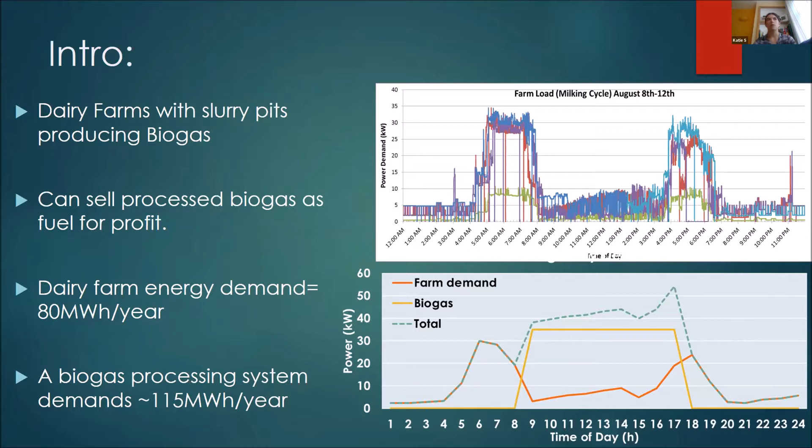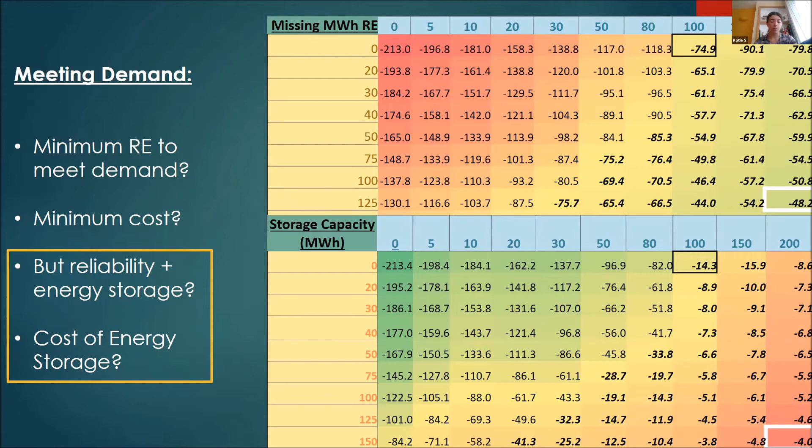Not even taking energy storage into account yet, those would be the minimum. But with energy storage, you want your storage capacity to be lowest, so you want a combination of solar and wind to bring down the actual capacity required at any one time.

In terms of actual energy storage, we're looking at using the methane produced to supply the missing energy. But the methane can be sold for profit, so we don't want to use too much of it. We have this balance we're trying to find.

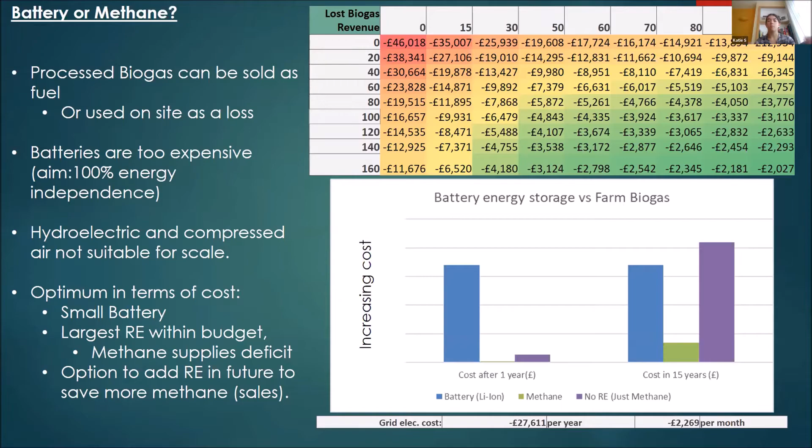But if you reduce that with renewable energy, you can minimize the methane use, making it more affordable until you can buy more renewables. So we're approaching this as a staged project: install one amount of renewable energy, then later, once more money is generated from selling methane, upgrade the renewables and become more energy independent, making more profit. That's the overview of our project.

Questions are welcome. The graph shows, with the example given of 102 kilowatts of solar and 80 kilowatts of wind, the average power supply, and hence the power demand from the farm and battery as well.

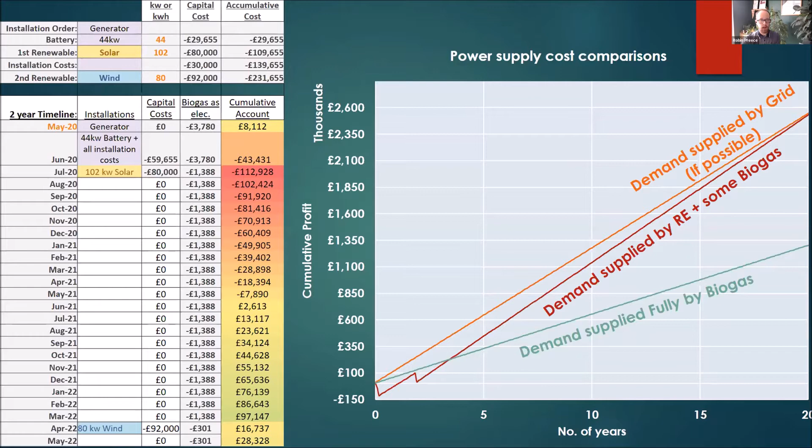Brilliant, thanks so much. I can't see anything in the chat column, so I'll chip in. How far through the project are you? We're at the stage where we'll be starting to install some wind, and there's already solar installed. Okay, excellent, coming along then. Brilliant, thanks very much. We might get some more questions later, but that's really interesting to see. Thank you very much. In the interest of time, we'll move straight on to the next one.

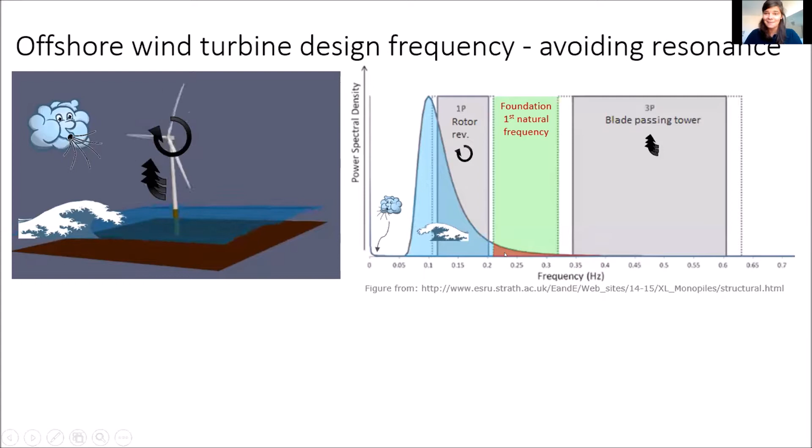And the frequency of wind and frequency of the waves. That's why monopile-supported offshore wind turbines are normally designed so that their natural frequency falls in this middle green range. The problem is that waves are a broad-banded frequency, so the higher end of the spectrum might overlap with the natural frequency of the turbines, causing nonlinear resonant phenomena, which causes these huge amplifications in the response with slow decay.

To give a little feel of this, I tried to find some video. This is not specifically an offshore wind turbine, but it should give a feel. These huge amplifications and slow decay cause a lot of damage to the structure, up to 17% higher fatigue and extreme loads.

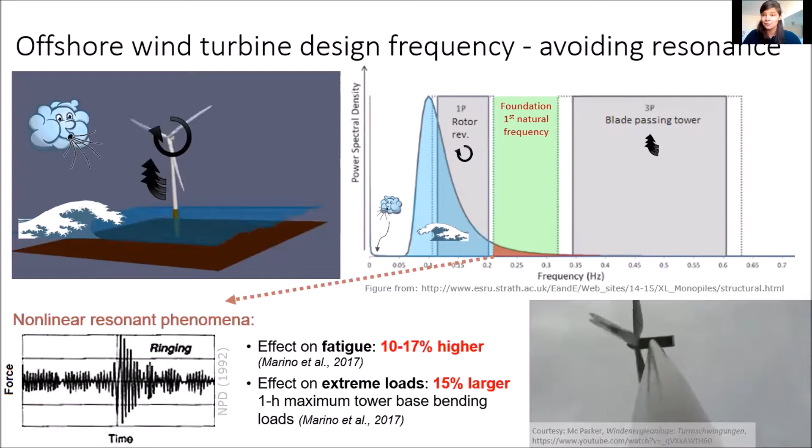So we really want to model these numerically, predict them, and account for the damage that they cause. Numerical modeling of wave loads on offshore structures involves modeling wave kinematics at the location of the structure, accelerations and velocities, and using hydrodynamic loading models to input these kinematics as well as characteristics of the structure to get the forcing and response.

So to model ringing, we can use linear, second order, or fully nonlinear wave kinematics. They're in increasing complexity, and that's why they increase computational time. For hydrodynamic loading models for slender structures, like the monopiles supporting offshore wind turbines, the Morison equation is most common, but there's also the more advanced Rainey and FNV theories.

In the literature, it is seen that regardless of the hydrodynamic loading model, with linear wave kinematics, ringing is omitted, but with fully nonlinear wave kinematics, it is captured regardless of the hydrodynamic loading model. So why don't we just use the fully nonlinear wave kinematics? Because they are very computationally heavy.

The intermediate second order wave kinematics, which are okay to be used in the industry, were seen to not capture ringing if the Morison equation was used. But I couldn't find any literature discussing second order wave kinematics with the more advanced hydrodynamic loading models. So that's one of my objectives in my PhD research.

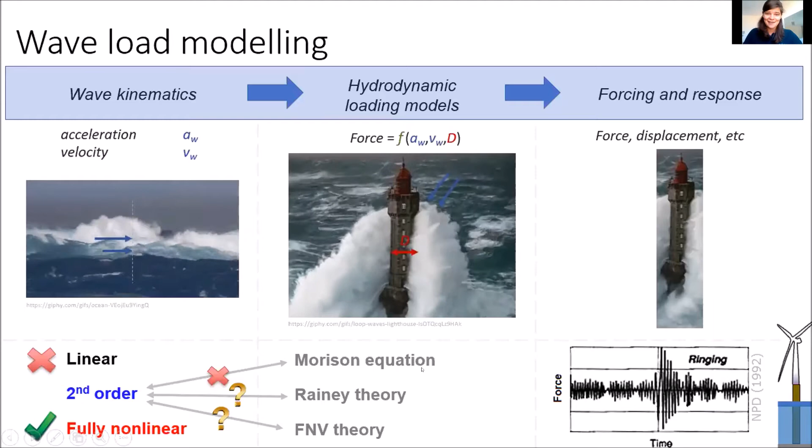And what I found was that, in fact, the amplification seen with fully nonlinear wave kinematics were not captured by the second order wave kinematics, regardless of the hydrodynamic loading model. So unfortunately, we can't optimize and just say use the second order wave kinematics, because in intermediate water depth, the nonlinearities in wave kinematics matter so much more.

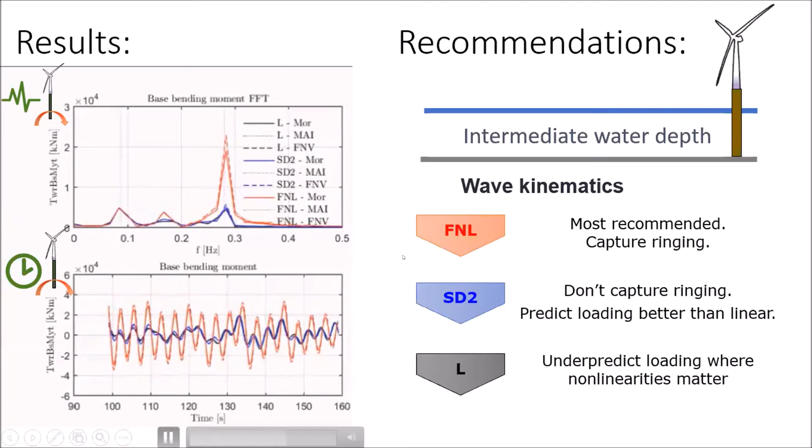So I really suggest using fully nonlinear wave kinematics to capture these amplifications, this wave-induced resonance, on monopile-supported offshore wind turbines. What's next, what I'm working on now, is that scour occurring in the first generation monopiles, or the future larger monopiles that we place in the sea, naturally leads to lower natural frequency, which may increase the range of waves that could trigger ringing.

So the more commonly occurring sea states might trigger these amplifications. I'm working on quantifying this increased response and its effect on the lifetime fatigue. So thank you very much, and I'm hoping for some questions.

No, brilliant. That's really interesting. There's a question in the chat, basically asking: you've done a lot on the modeling, does that also translate into an age reduction, and how does that map through into the stress on the monopile?

Yeah, I'm now trying to work on quantifying the lifetime fatigue, but the work I've done already was mostly on one-hour nonlinear sea states, and it was seen that the nonlinear amplifications caused up to 30% more fatigue. Since these very nonlinear sea states don't occur for the whole of the lifetime, it will not directly translate into 30% less lifetime.

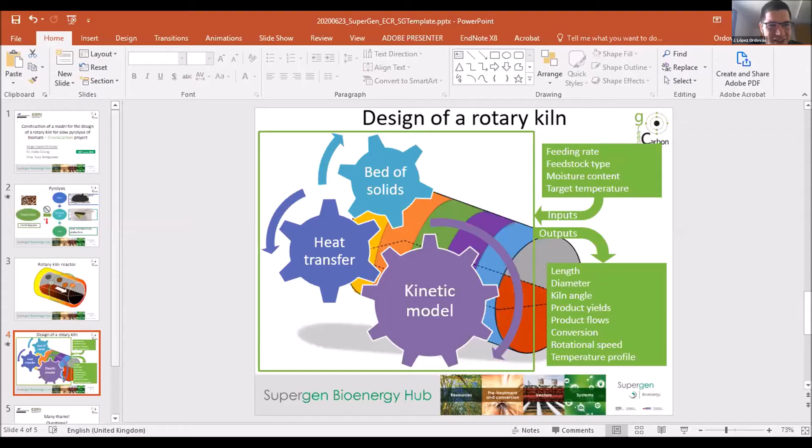Yes, okay, perfect. So hello everyone, good morning. I'm Jorge Lopez Ordovas. I'm from Aston University, and I'm going to present as part of the Supergen bioenergy hub. I'm at the Energy and Bioproducts Research Institute, and I'm under the supervision of Katie Chong and Tony Bridgwater.

I'm a PhD student, and I'm going to explain a bit about the construction of a model for the design of a rotary kiln for slow pyrolysis of biomass. It's part of the Green Carbon Project, a European project that, well, I don't have time to go into right now.

So I want to start explaining what's pyrolysis. Pyrolysis is just increasing the temperature of a feedstock to produce three products: char, pyrolysis oil, and gas.

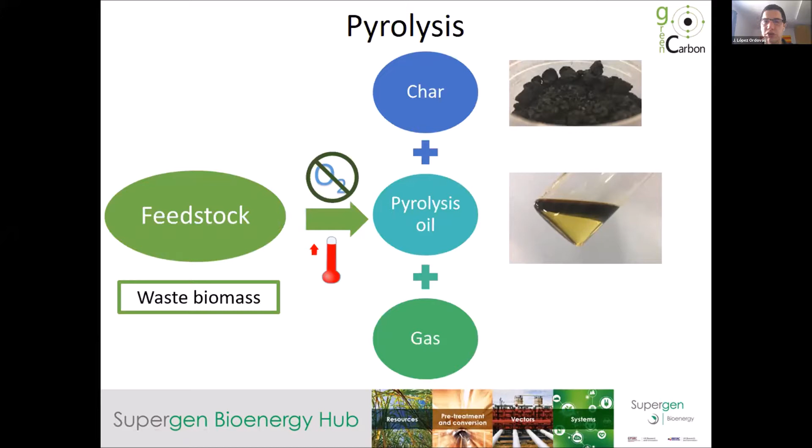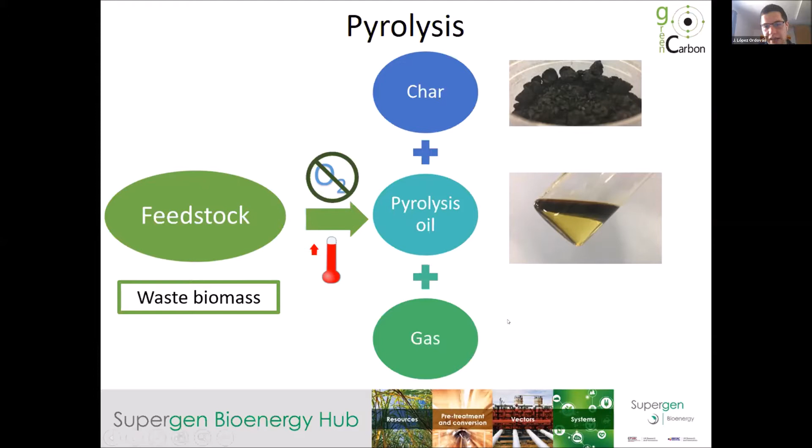The feedstock normally is waste biomass, to avoid using soil that can be used for food. The objective is to use the soil to plant food, and then use residues from harvesting and other biomass residues for pyrolysis to produce gas, which provides heat and electricity; pyrolysis oil, used for production of chemicals and for heat and electricity; and char, that can be used for carbon sequestration, soil amendment, and energy production.

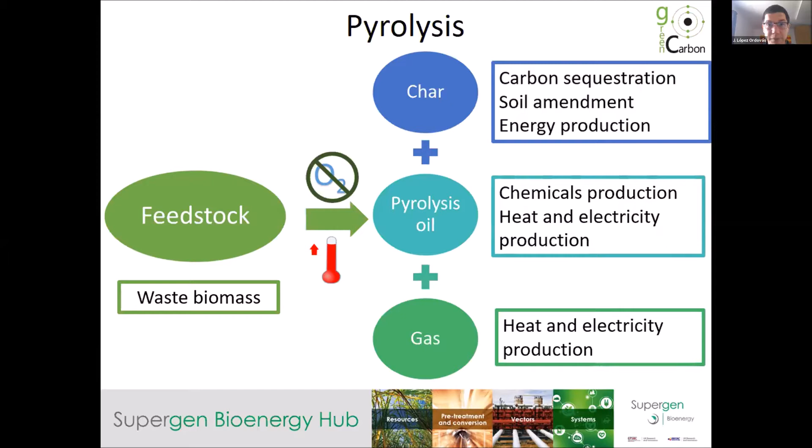It's quite a complex system. We have three different factors to take into account. We have to consider the bed of solids because they behave in a different way. We have to consider how they evolve, how they behave under rotation, and how homogeneous the product and the solids inside the feedstock, inside the reactor, can be.

Then we have to consider heat transfer, a very important part in pyrolysis. Some other reactors are a bit restrained by heat transfer, so it's important that the kiln we're designing is working as homogeneously as possible, avoiding any kind of temperature gradients inside.

Finally, pyrolysis is a very complex process because the kinetics are not clear. The pyrolysis oil combines many different substances, and it's impossible to have the kinetics for all of them.

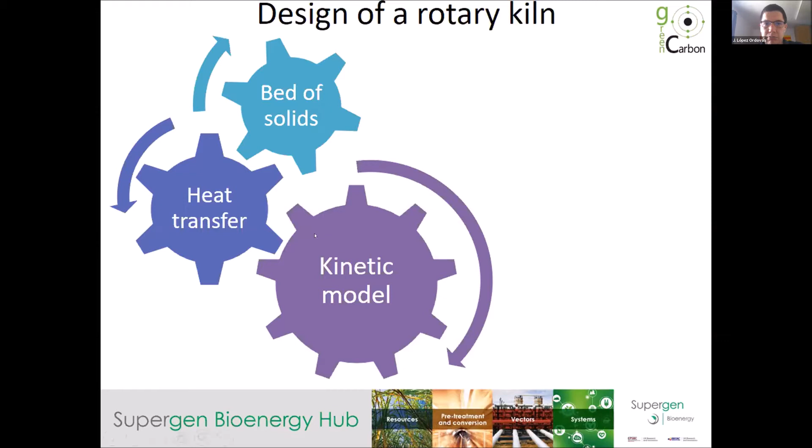So the idea is to have a feeding rate, feedstock type, moisture content, and a target temperature to put inside the model. Then the model will do all the calculations and give the length, the diameter of the reactor, the kiln angle, but also the product yields, the product flows, and the conversion, and some processing parameters such as rotational speed or temperature profile of the reactor, the wall, and the solids inside.

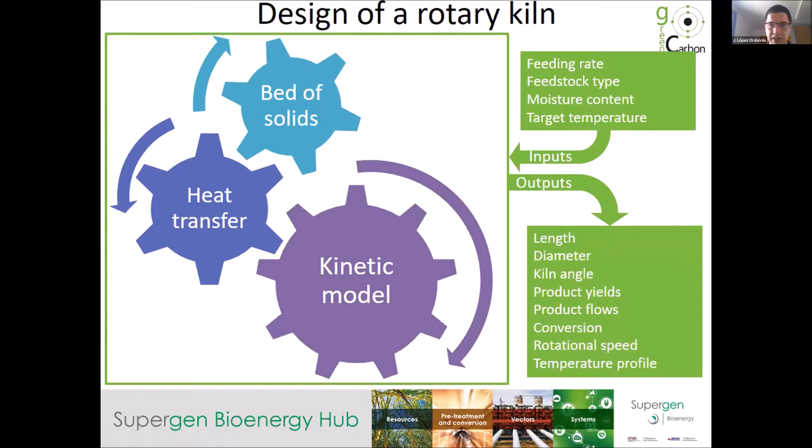Just a bit of overview of what I'm trying to do to model this reactor: I'm dividing it into slices, shown here in different colors, and on each of the slices we're implementing the same algorithm. We create all the slices, put the same algorithm, and use the output from one slice as input into the next. That way it's easier, because the systems are smaller and more realistic, and easier to model.

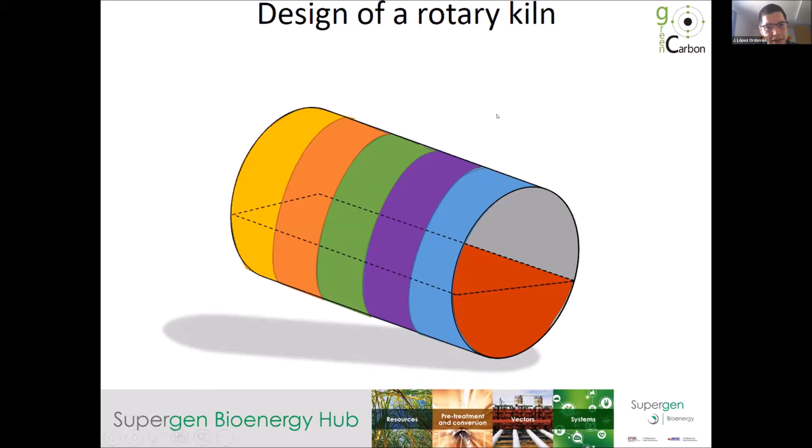And that's all I wanted to tell from myself. If there are any questions, feel free to contact me or ask right now. Thank you very much.

Excellent, thank you very much. One quick one from me, because I can't see any in the chat. So again, I get the opportunity: are you building this as a physical thing as well, or are you comparing your model to a physical one?

No, well actually I'm now finishing my PhD, handing in within a week, so wish me good luck. No, it's quite a fun time right now. It's just a computer model, a program that aims to design a reactor no matter what the inputs are. So it cannot be very complex, but at the same time it has to be consistent to get a PhD done.

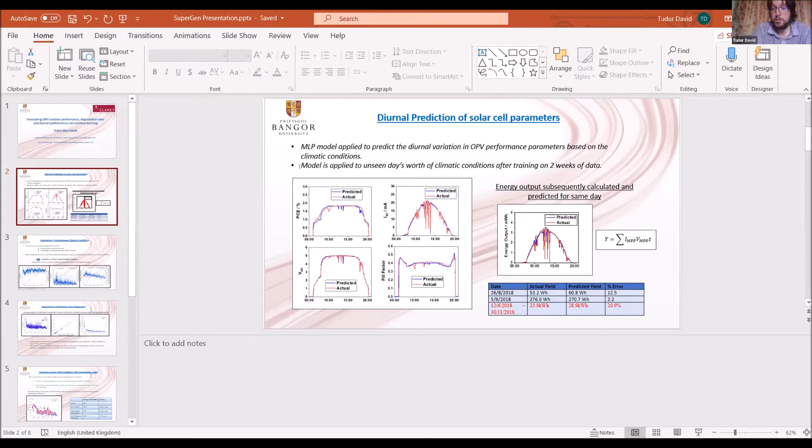We then use this information to calculate the energy output, comparing a cloudy and sunny day. The 5th of the 9th is a sunny day, and the 26th of the 8th is a cloudy day, and we see we can accurately predict the energy output. When we sum all of these energy outputs over the course of the whole test, we can predict the energy output with a 20.9% error.

However, in order to predict and forecast the outdoor performance of OPV modules more fully, we also need to understand both the performance of the devices as a function of daily weather conditions and also the degradation of the modules.

So to model the degradation state, we have considered the total exposure of the modules to different climatic conditions, as well as the instantaneous daily weather conditions. This can be considered analogous to the dose of each climatic condition. The graph shown here illustrates how different climatic conditions can accumulate over time, despite the instantaneous values decreasing or remaining relatively stable.

The degradation of the modules is analyzed by taking the PCE at 250 milliwatts per centimeter squared over the course of 5 months, averaged over the 10 modules being tested. This shows the predicted time-dependent degradation based on exposure to environmental conditions, and the model employed here uses both the cumulative and instantaneous climatic conditions.

Therefore, this allows us to know the forecasted state of the modules based on the level of degradation up to 5 months into the future, achieved with only 2 weeks of training data. This significantly reduces the time required to test the modules, and therefore potentially provides a means of assessing technologies in a much reduced time frame.

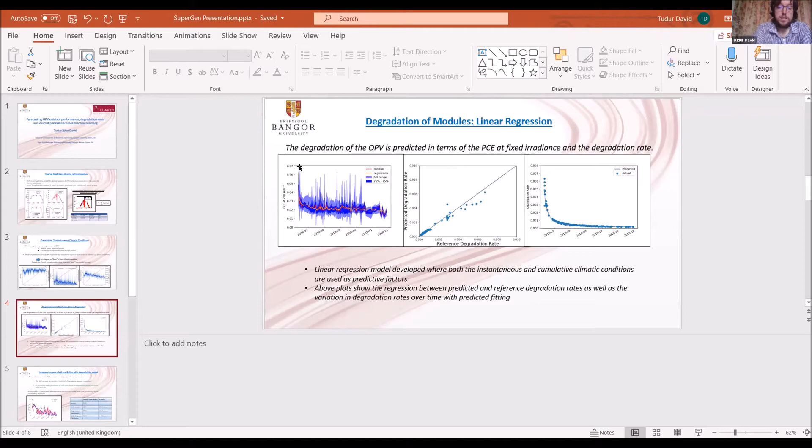So then finally, we show how we can predict the degradation over the course of 5 months using a combination of methods. The degradation of the modules is forecasted initially in 2 different ways. Firstly, using the MLP model, which considers the diurnal variation in climatic conditions, and a model developed which predicts the daily yield variation based solely on the degradation state of the modules, determined from linear regression and considering the cumulative exposure to different climatic conditions.

And then what we do is finally, the results of these 2 methods are convoluted such that the effect of the degradation is included in the prediction made by the MLP algorithm.

When this is performed, the percentage error is reduced to 4.1% compared to 20.9% using only the MLP, and 15.2% using only the degradation prediction and the initial state of the modules. Therefore, this provides a means of accurately predicting the stability and power output of the modules over a period of 5 months based on only 2 weeks of training data.

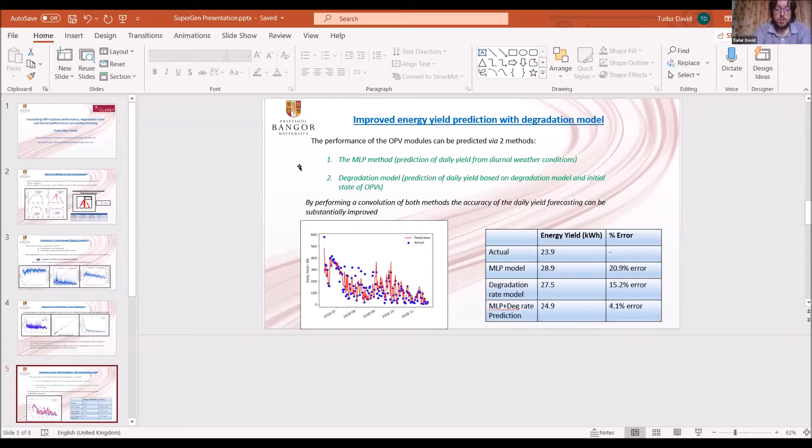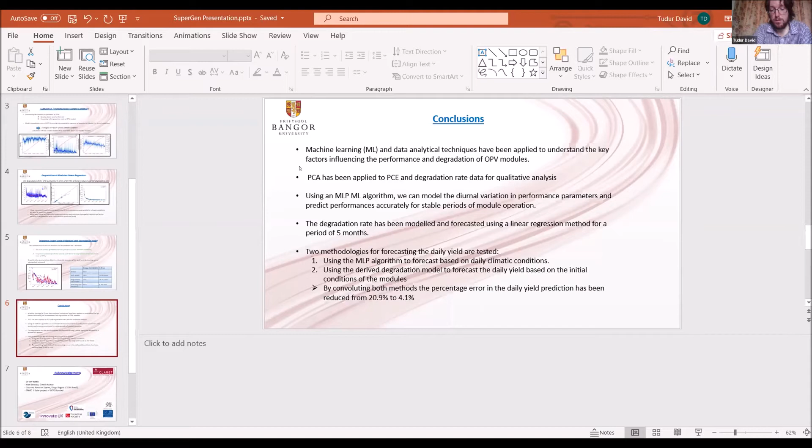So in conclusion, we have shown how ML techniques can be applied to understand and predict the operation of OPVs in real-world conditions, as well as predict the degradation rates of these modules based on cumulative exposure to different climatic conditions. I'd like to acknowledge everyone in my group, and thank you very much for listening.

Brilliant. That sounds like magic, the way the errors seem to disappear at the end.

So we have a question from Richard: what's the predicted lifetime degradation? Can you map that out further into the future? You're talking about a 5-month lifespan.

Yeah, so for prediction, I think the error will gradually get larger the further we take it, but we haven't tried going much further at this point. The plan is that hopefully we can take any forecasted weather, with the diurnal variation, apply the model and see the output. With the degradation rate, it should be quite simple because it's just a matter of extrapolating out, and plotting in at any time.

So if you're happy for the error to get larger, then you could take this as far as you wanted to, potentially. It's just a matter of improving the algorithm to get the error as low as possible.

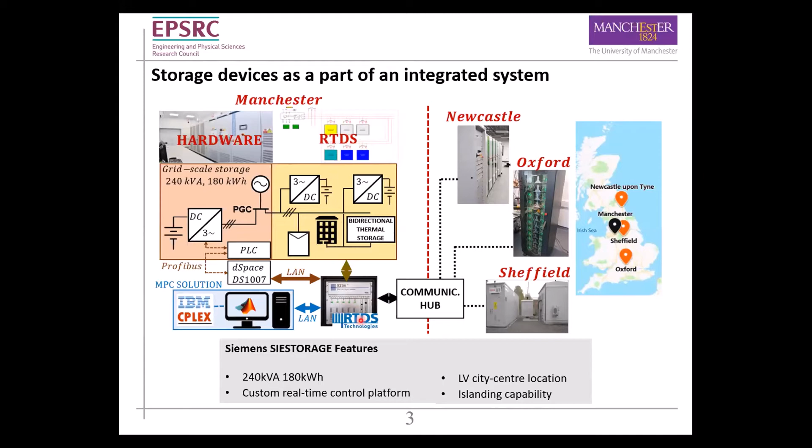Why do we develop this system? In order to study the optimal performance of storage units by means of a centralized controller, which was developed in MATLAB Simulink and speaks with the RTDS network simulator.

The idea is that the provision of multiple services to the power system is a smart way to increase the profitability of storage devices. In particular, we analyzed the provision of energy arbitrage and frequency regulation together.

To do this, we developed a hierarchical control architecture, which consists of a day-ahead scheduler, a real-time MPC controller that runs in MATLAB and speaks with the RTDS network simulator, and some local controllers directly interfaced to the hardware and simulated units inside the system.

And I think we've lost Alberto again. Is that just me? No, unfortunately, I'm seeing a few nods.

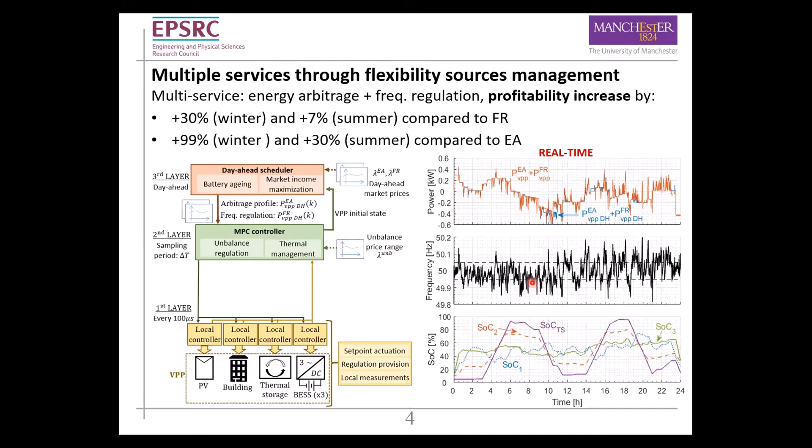frequency regulation. Ah, wait, he's back. Alberto, we've got you back again. Can you hear me? No? Okay, well, let's move on because this will become infuriating.

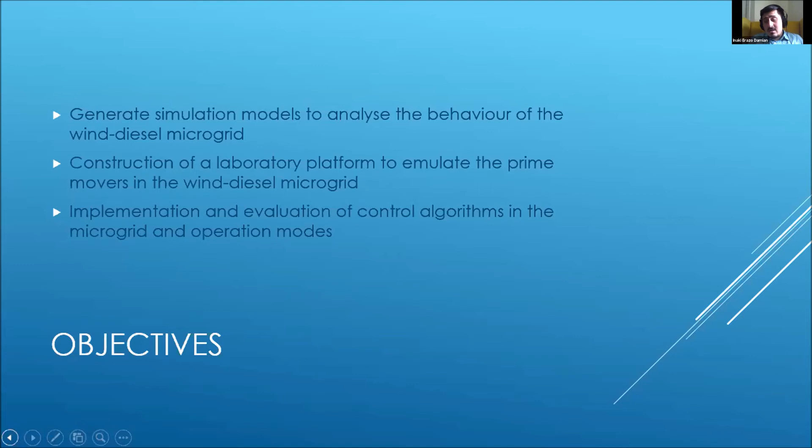The specific objectives are basically to generate simulation models to analyze the behavior of the microgrid, then the construction of a hardware in the loop system, a laboratory platform to emulate the prime movers - a wind turbine and the diesel engine in the microgrid - and the implementation of control algorithms for different tests of the system.

This is basically the experiment setup. As you can see, we have the two prime movers, the diesel engine and the wind turbine. Both are basically induction machines in reality, but we have some algorithms to represent the real systems. We have a physical gearbox, and the two generators we are dealing with are the synchronous generator, wound field synchronous generator, and a double fed induction generator, with some power electronics and resistive loads. We have a set of contactors to change the different configurations in the system.

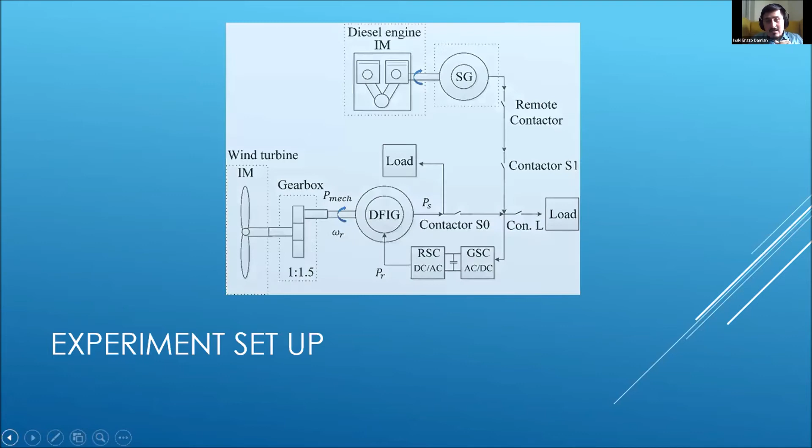As you can see from this diagram, very quickly, not going into much detail, we have a synchronous generator on your right, at the edge, and we have some regulation of voltage, frequency, and power in the system when they are connected together, or when the wind turbine is connected in standalone, which is something that can still happen.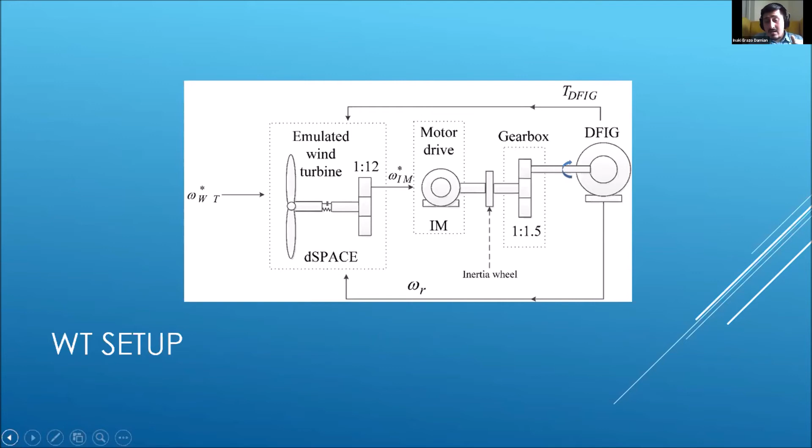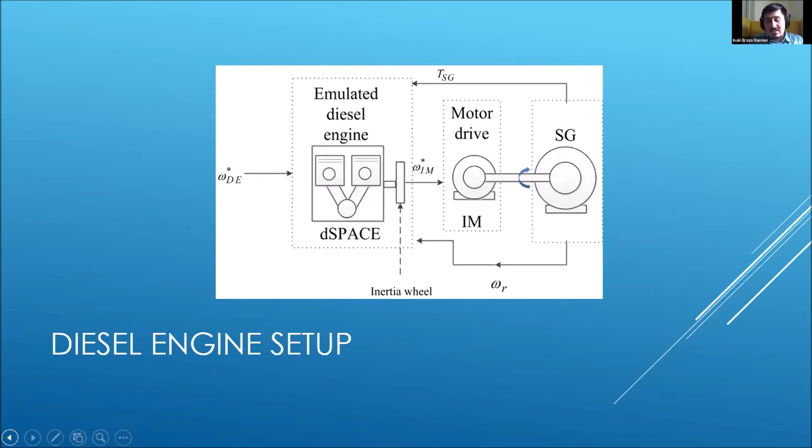With this, we have the wind turbine setup, which is basically done in dSPACE, connected to the induction machine and the generator. And this is our lab setup. On the other scenario, we have the diesel engine, and here it is in the lab.

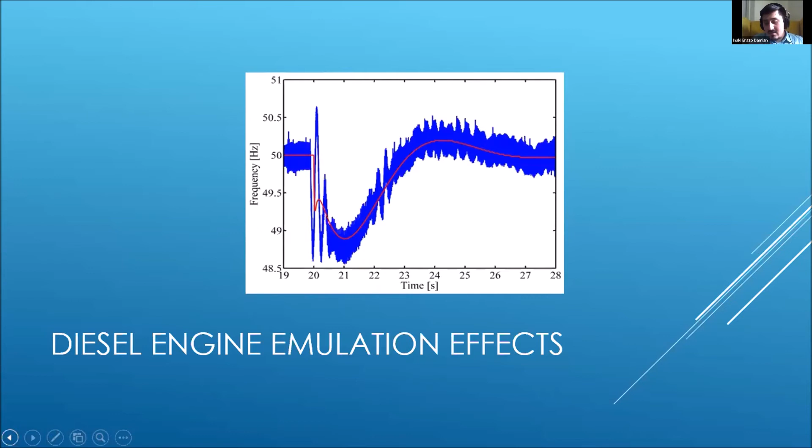So we need to evaluate the emulation effects. This is how it looks normally, the drive, when you put a 9 kilowatt load in the system. But when you start doing the emulation, you start seeing changes in the frequency. Obviously, we had to do some simulation before that, which is the red line, to predict what we would be seeing in the lab first.

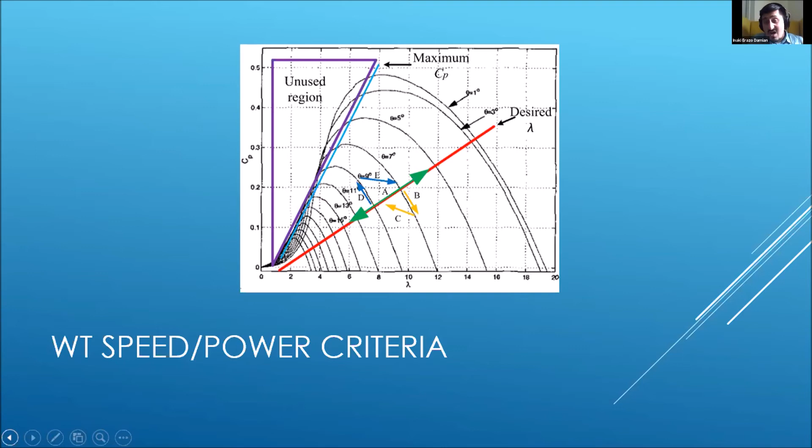For the wind turbine, basically what you're seeing is a lookup table that we were using, where you have different speed conditions and power conditions. Lambda is basically the relative speed between the wind turbine and the wind, and CP is how much power, in rough terms, you're getting from the wind turbine.

We created an algorithm to select the speed, because in certain conditions, even if we wanted to operate in a certain region, it is not possible because it will be overspeed or underspeed for the wind turbine.

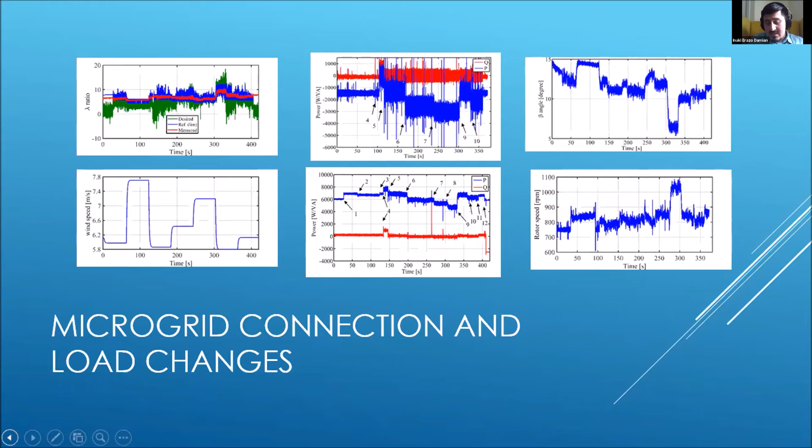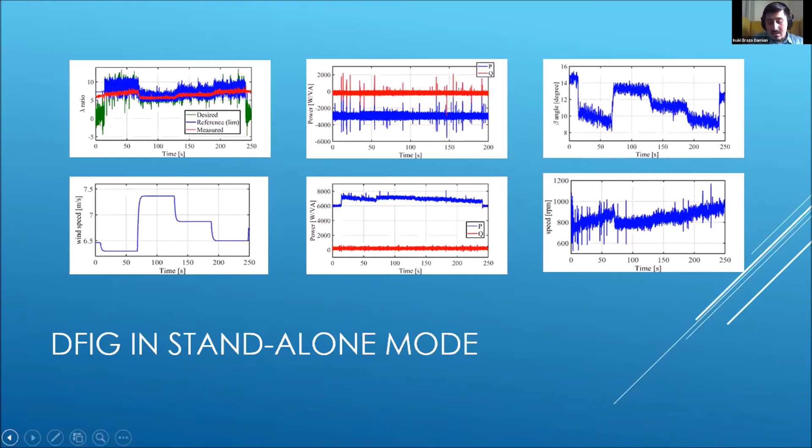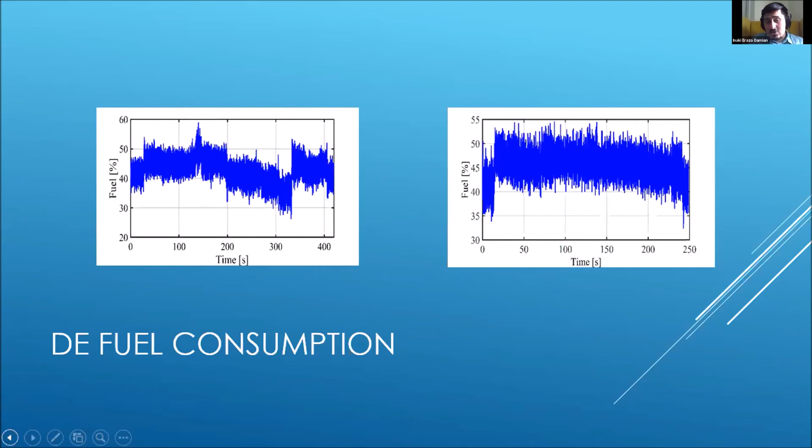And with this - okay, what do you do when you have the two systems? You need a criteria to decide how you are going to use the wind turbine and the diesel engine, how you need to switch them on and off. From the literature review, and from the system that we are emulating, we could obtain some criteria for the operation - turning on and off - of the diesel engine.

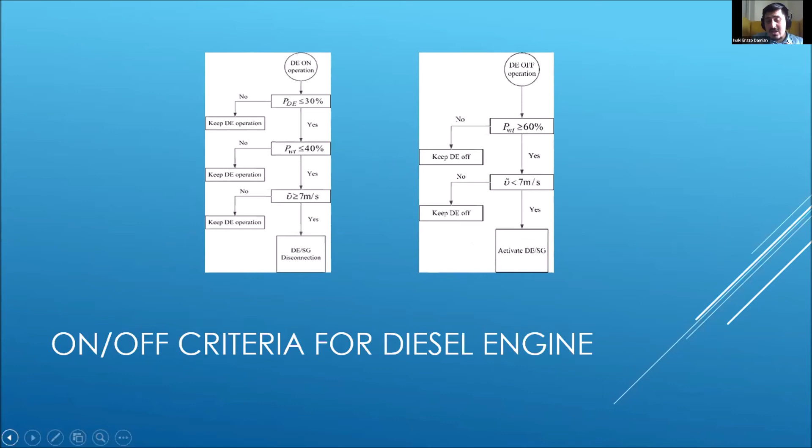The conclusion is that we could get a fully validated simulation with the platform. The laboratory results showed a smooth synchronization, something very important. The wind turbine was verified both in simulation and experimental testing. This allows for future integration of other power sources or power electronics. We could see a lot of potential for developing power electronics for the platform.

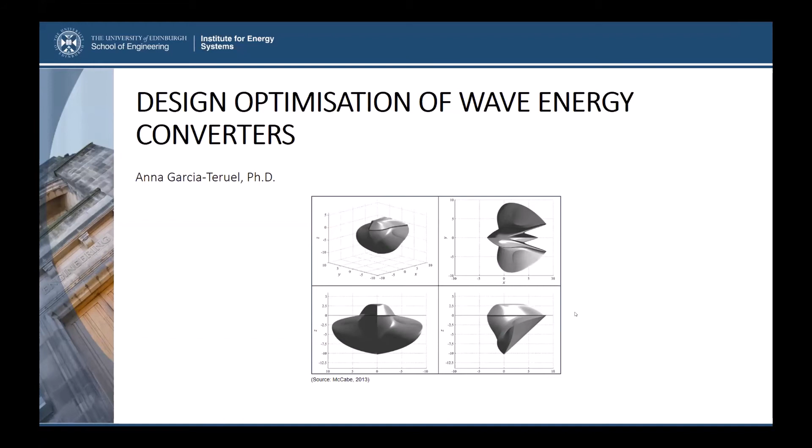Yes, so you should be able to share the screen. Perfect. Okay, hi, good morning. My name is Anna Garcia-Teruel, and amongst others, I do research on design optimization of wave energy converters.

So why wave energy? There's a high energy potential available in ocean waves. The usable wave energy resource has been estimated to be 52 gigawatts in the UK, 300 in Europe, and around 3,000 globally. And to use this extensive resource, wave energy converters have been studied and developed for many years.

To date, the levelized cost of energy of these technologies is around 100 to 500 euros per megawatt hour, but the cost is expected to reduce to 75 to 100 euros per megawatt hour after deployment of 10 gigawatts. For context, the LCOE of offshore wind today is around 100 euros per megawatt hour.

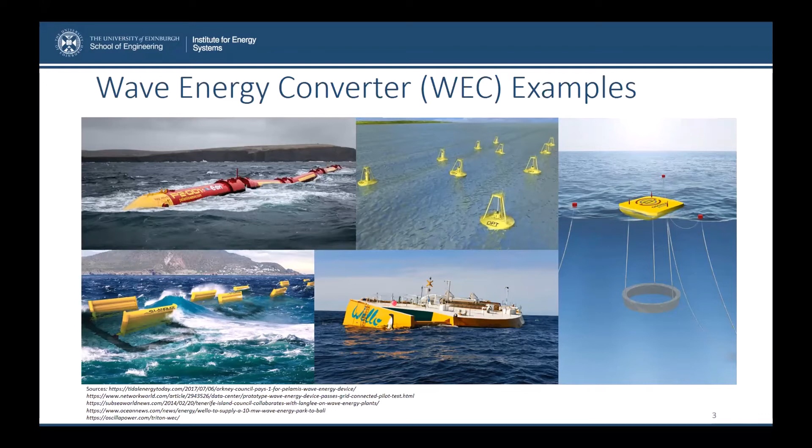So these are some examples of wave energy converter concepts that have been developed and tested, and they use different principles to extract energy from the waves. But the main components of a wave energy converter are the floating body, the power takeoff system that can convert the oscillation into electricity, and the mooring line that keeps the wave energy converter in place.

In a simplified way, to extract more energy from the waves, the natural frequency of the floating body needs to match the frequency of the incoming waves, since then the body will have larger oscillations. The natural frequency of the floating body will depend on its shape. At the same time, there will not be only one wave of one frequency, but many waves of different frequencies.

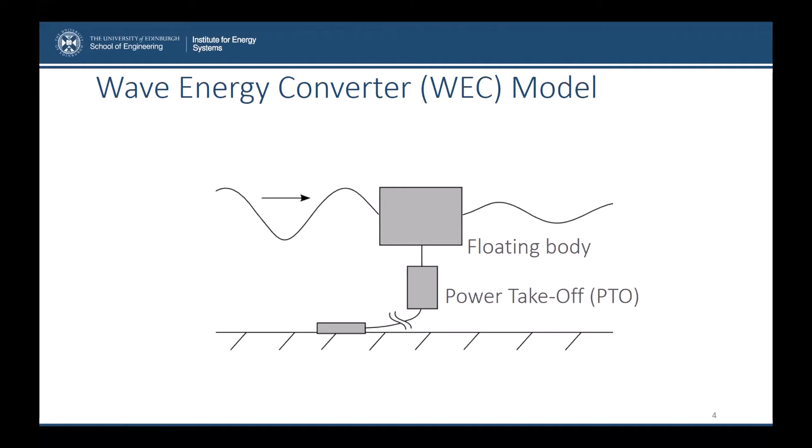The floating body will be subject to high loads in high energetic seas, such as after a storm, and it should be easy to manufacture to reduce costs. So it is not trivial how to design the floating body of a wave energy converter.

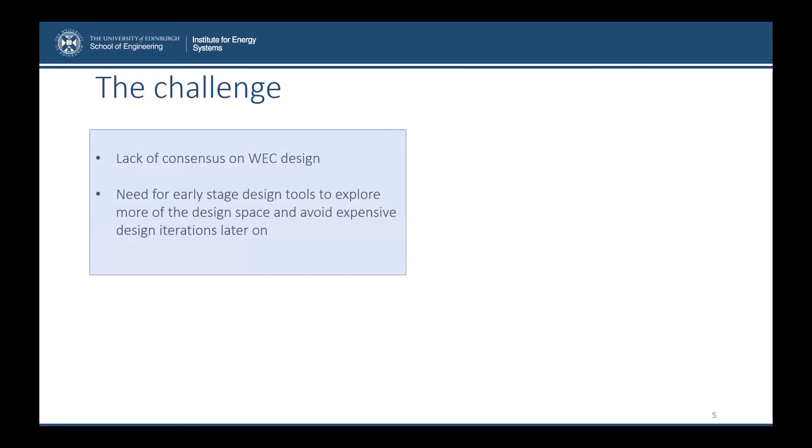So to describe the main challenge here, we have two sides. On one hand, as you could see, there's a wide range of wave energy converter designs, and this points to the need of early stage design tools to explore more of the design space and avoid expensive design iterations later on once the device has been built.

And on the other hand, the highest cost reduction potential is associated with the structure, and as you could see, it's not straightforward how to design the structure or the floating body, and for this reason many geometry optimization studies have been performed in the past decade, but there's no consistent methodology to do this.

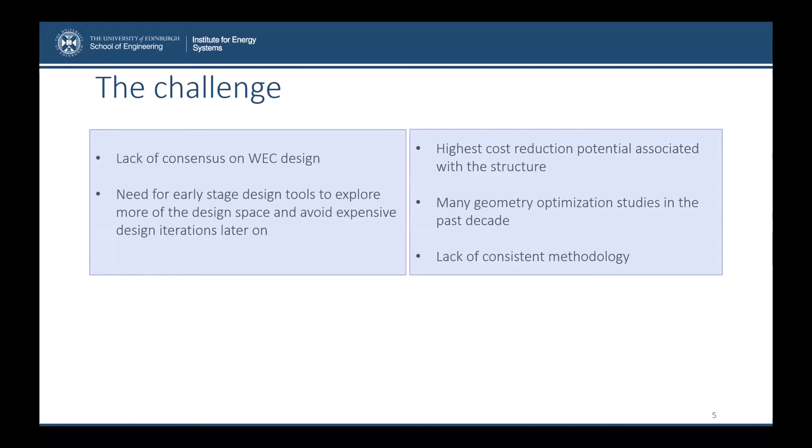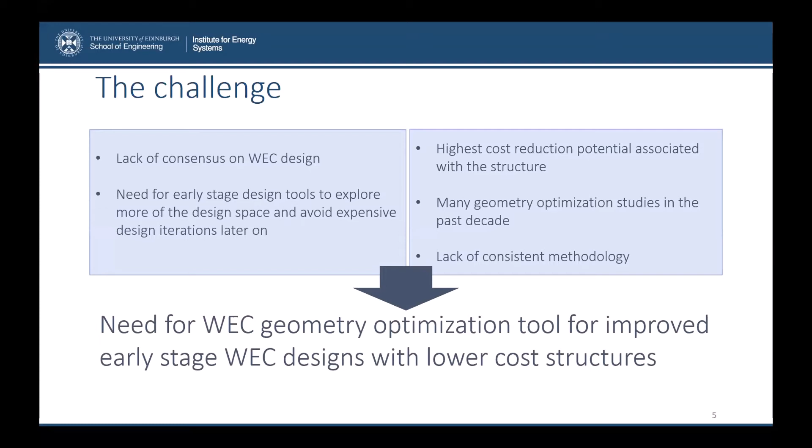So if we bring those two together, we see that there's a need for wave energy converter geometry optimization tools that are able to generate improved early stage wave energy converter designs with lower costs associated to the structure. And so for this purpose, I developed a wave energy converter design optimization approach capable of generating very diverse shapes so that we can explore more of the design space.

And this is based on a previous method developed by the late Dr. McCabe and uses cubic B-spline surfaces to define the shape. However, as you can see from the resulting shapes from the previous study, the resulting shapes might not be able to survive high energetic seas or be cost effective to manufacture.

So during my PhD, I expanded this method so that although being able to generate diverse shapes, the resulting shapes would have characteristics that truly reduce the LCOE. And this is not only maximizing power, but using different proxies for costs and accounting for a number of factors that will have an effect on costs, such as manufacturability.

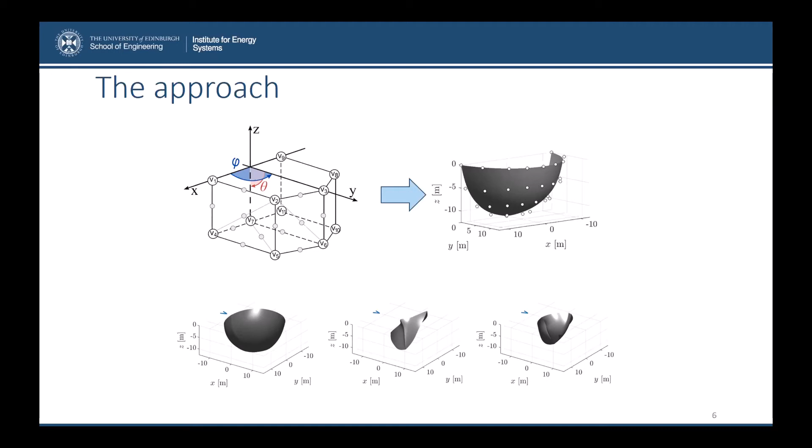And so why is the world a better place? Why is this useful? So this is useful for technology developers who can apply the method to generate improved initial designs of their WECs, or wave energy converters, and avoid more expensive design iterations later on. And I am currently working with a technology developer to improve their design.

And this is also useful for funding bodies who can use the metrics that I developed for comparison of different designs to compare devices. And they can use the method to find potential limits of devices in terms of the optimal relationships between power, volume, and surface area. And I'm currently working with Wave Energy Scotland to define these types of relationships.

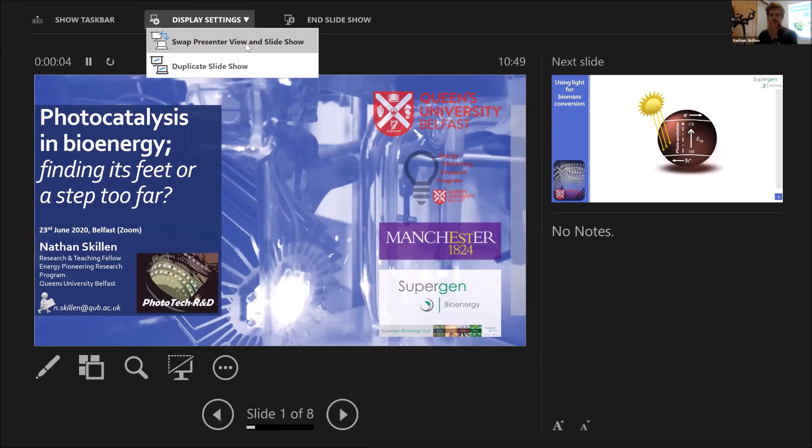Okay, thanks very much. So my name is Nathan. I work for the Bioenergy Hub. I'm sort of between Queen's University, Belfast, and Manchester, and all our work is really around photocatalysis and bioenergy. It's a relatively new field, which is why the title of my presentation is Finding Its Feet or A Step Too Far. So what I'll try and do in 5 minutes is give you a quick overview and a bit of a snapshot of some of the data that we've got.

Now, I'm aware that not everyone will be familiar with photocatalysis, so I thought I'd start with a brief description about what it really is. And essentially, it's the same as any other catalytic process, apart from we use light to activate the catalyst. So usually you want to activate your catalyst to drive your reaction in some ways. So we don't use temperature or pressure, but we use light. And depending on the catalyst, you use different types of light.

So what happens is we get two things. We get oxidation, usually using water, and we also get a reduction reaction. And in a really sort of brief nutshell, that's photocatalysis. That's photocatalysis in a nice little box.

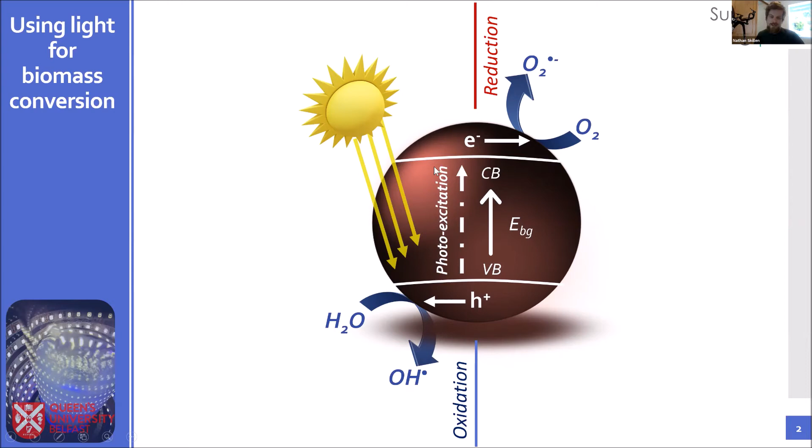The main things are we get these radicals produced. So you see an OH dot and an O2 dot minus here as well. And it's what we do with those radicals for biomass conversion. So the way we apply it here is we look at radical attack of different types of biomass. And really what we're trying to do is break down some of the key bonding patterns within different types of biomass and release valuable compounds or release energy as well.

So there's a lot of interest in photocatalysis from that perspective. But where it gains a lot more interest, and where you see in the literature quite a lot, is the alternative reduction reaction that can take place, and that's hydrogen production. So if you modify your conditions slightly and you add a co-catalyst, you can actually generate hydrogen. So as a package, as a nice little neat box, you can see that we can potentially use solar light to produce hydrogen from potentially waste products as well.

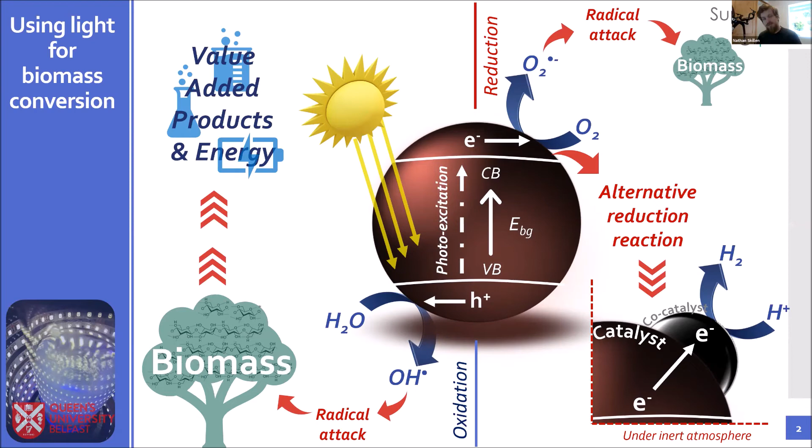Now that's all really good, but at the end of the day, photocatalysis is quite a young field. The timeline here gives you an idea of it. And especially for biomass conversion, we're still an infant, I guess. We've still got a little bit of development to go, which means we're a little bit further down the TRL scale than other technologies. And the first paper was actually in the 80s, but it wasn't really until about 6-7 years ago we started seeing some more of the fundamental work. And then in the last couple of years, there's been a big increase in the number of papers that have been published on the topic.

So you can see the two projects that we've had by the flags here. We started in about 2013 with the Bioenergy Hub, and now we're on to our second project with them that's just been running for, I think, about 6 months now. And what we're really trying to do is take the knowledge that we've got so far and push it a little bit further forward and advance the field if we can.

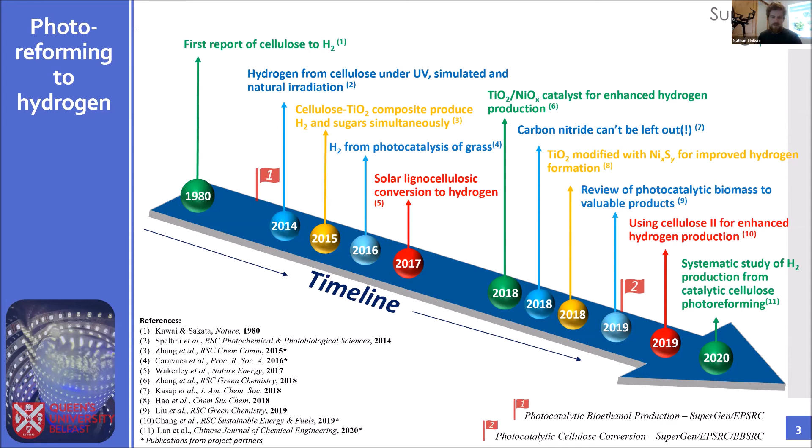So if I give you a snapshot of the data, we can look at it as a reduction and oxidation. On the reduction side, it's basically hydrogen production, and the good thing is we can actually get hydrogen from cellulose. The chemistry is quite challenging there, so to get that to work initially was quite exciting. We can see that we can actually get quite a lot of hydrogen from glucose as well, which gives us an indication of what the mechanism might be.

We've also looked at how we can enhance the amount of hydrogen we get, so we use pre-treatment steps. That can involve some chemistry in terms of changing the structure of the starting material, or even ball milling it. In both cases, you can see we get a nice increase in hydrogen, a nice increase in quantum yield.

The other nice thing we can do is solar activated photocatalysis. The graph on the top right shows data for solar hydrogen production from cellulose, and this is work that we did at the University of St Andrews. Anyone familiar with Scotland will probably be aware you've got a better chance of getting windburn than sunburn north of the border, so to get solar hydrogen from cellulose is actually quite impressive, and we're really pleased with it.

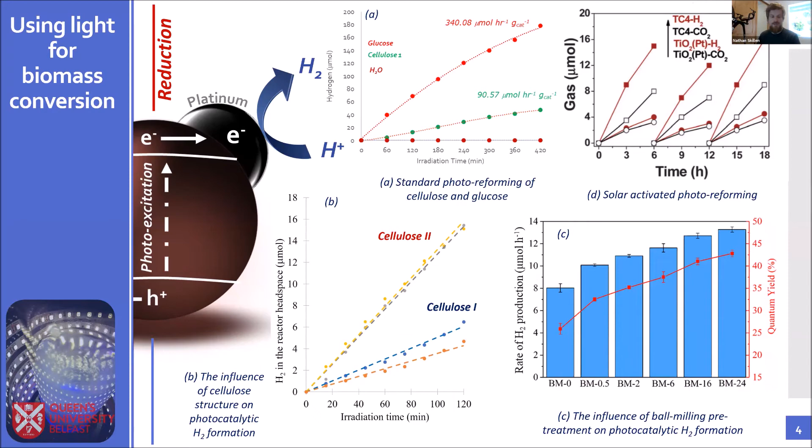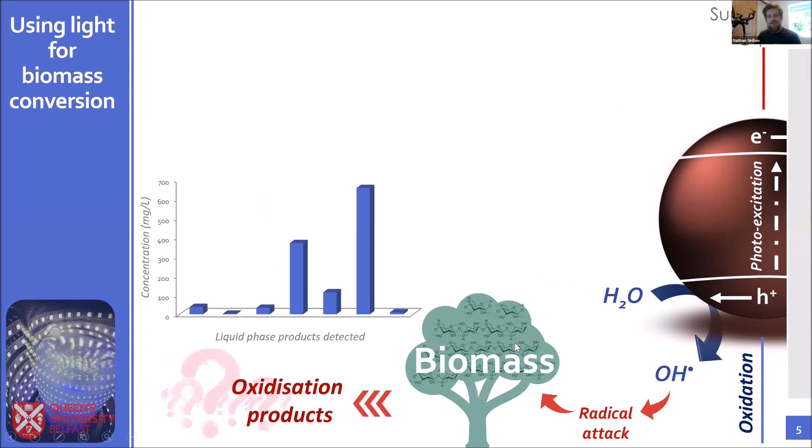Now the other side of that coin is oxidation, and this is where it's a little bit trickier. Hydrogen production is relatively easy by comparison, but when we start looking at the oxidation and the liquid phase products, the mechanism changes quite a lot, and there's an awful lot that goes on. This is something we're trying to figure out within our project.

If I use this graph as an example, we tend to see 20 to 30 different liquid phase products depending on what the start material is. The concentration range there is fairly accurate for an average reaction. Generally at lower concentration we see sugars that we can use for bioethanol production, and the higher concentration liquid phase stuff are usually smaller organic compounds. A lot of them are actually viewed as potential platform chemicals, but it changes and varies quite a lot depending on the start material.

So depending on whether we're using standard cellulose, lignin, or some sort of waste, the nice thing is we can do it simultaneously. This graph shows some of the data we get - these are sugars that we get while we're also generating hydrogen. So oxidation and reduction reactions have to kind of happen at the same time, so we do have a bit of a dual purpose system. Not only are we generating valuable compounds in the liquid, we're generating an energy source from the reduction as well.

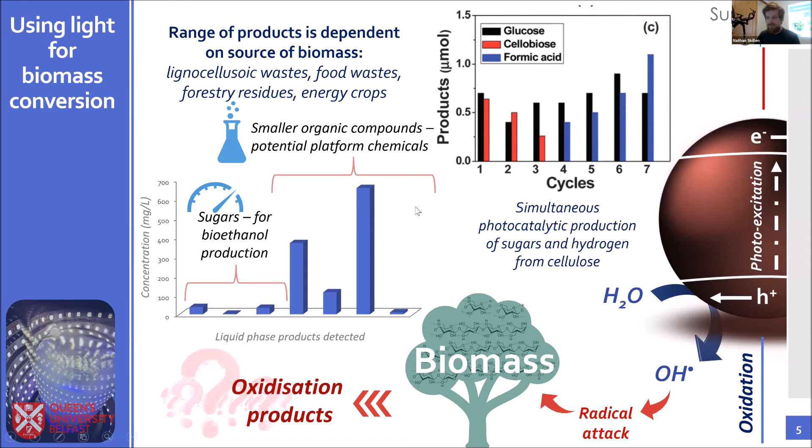That's photocatalysis and biomass conversion essentially in as quick a time as possible. We've still got a little bit of development to go, but there are really desirable characteristics there which we're trying to push forward. So we'd argue that photocatalysis is now finding its feet in bioenergy. Our project going forward is really looking at controlling the mechanism as much as possible and investigating how we can develop it in terms of energy efficient systems, and hopefully pushing towards scale up and potentially a pilot scale deployment. Until then, I think at least we have some fairly pretty pictures that we can take of our research.

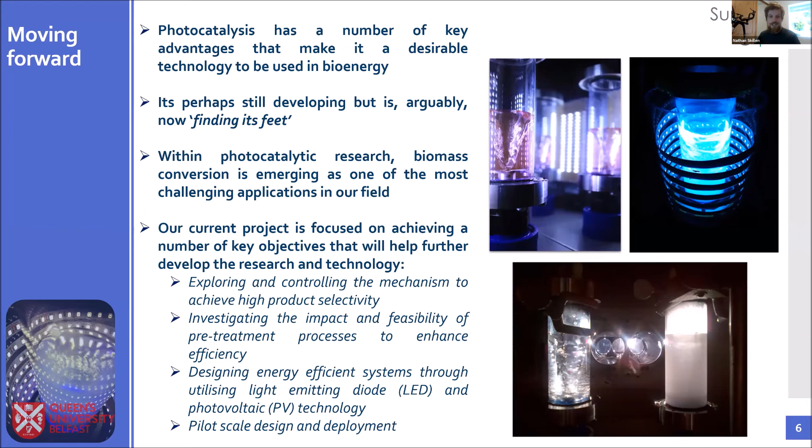Thank you very much. I was going to say, it definitely feels like you're falling on the finding its feet side of things, and seems very promising, even if it is bringing back bad memories of chemistry lessons for me. I can't see any questions at the moment, but there might be some that pop up. And again, in the interest of time, I'm aware we're already running a little bit late.

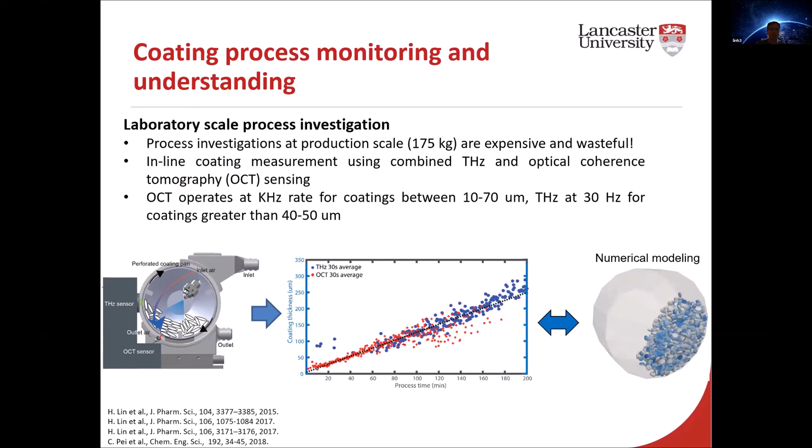Here we're also combining with an optical sensor, and the reason for combining it is because we can then start looking at very thin coatings. What we want to do is combine these different measurements into a numerical process model that is designed to capture the process complexities. So this is still very much a work in progress.

Now, using other characteristics of terahertz, we can also map out the electrical conductivity of graphene over large areas. The conventional way of doing this, if you've got a sheet of graphene, is you need to make electrical devices by means of lithography. As you may or may not know, this is a very time-wasting and destructive method.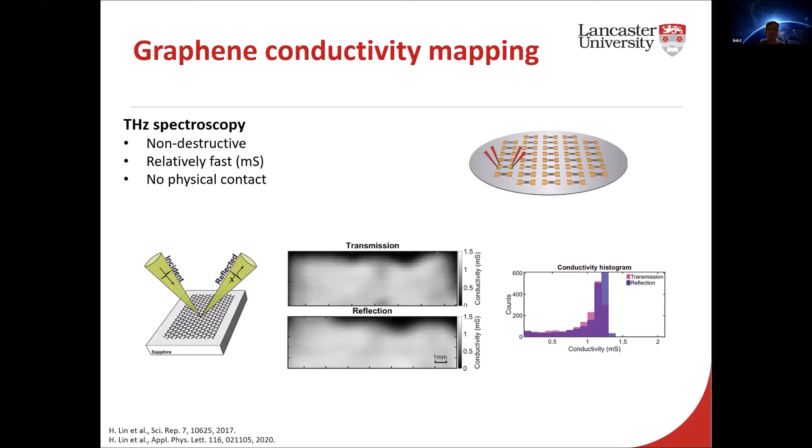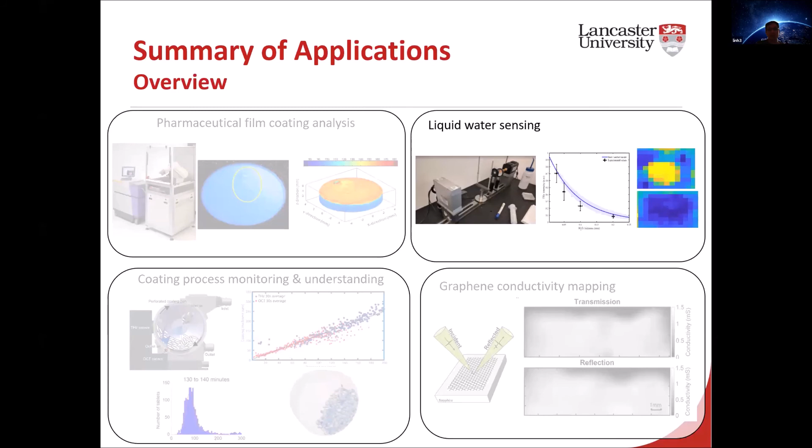Because once you make the devices, you need to measure each of them individually, and then you throw away the wafer. What terahertz spectroscopy has shown is you can measure the electrical conductivity of graphene non-destructively, without making devices, relatively fast, on the order of milliseconds per point, and with no physical contact because it's ultimately light. Having looked at these examples of what terahertz could do, we could also use terahertz to start looking at water content inside materials without physical contact.

My PhD student Desio here has put together a simple terahertz transmission system. So you've got some sort of terahertz source, some sort of terahertz camera, and some sort of sample. It's a transmission setup.

Liquid water is a material that is very polar and so strongly absorbs terahertz. So if we put a detector after liquid water, we'd expect there won't be much terahertz transmitted because it's all absorbed. That's what we see in this diagram, as opposed to when the sample holder is filled with air, for example, free space, whereby all the terahertz just transmits through and we get this lovely yellow spot. It's good that we can qualitatively see this, but what's more exciting is if we can quantify the amount of water there is from a light measurement.

So what we did was play around with different water thicknesses, corresponding to these dot points, plotted against a backdrop of Beer-Lambert's law. So from a relative terahertz measurement, you can start estimating the water thickness.

We applied this to Nafion membranes, which are commonly used in hydrogen-based fuel cells, to see the water pickup there. With a Nafion membrane, we watched the water dry from the estimate. From the relative transmission we can estimate the water thickness, and from the water thickness we can estimate the water content. This is benchmarked against a simultaneous gravimetric analysis, and generally there's good agreement between the two.

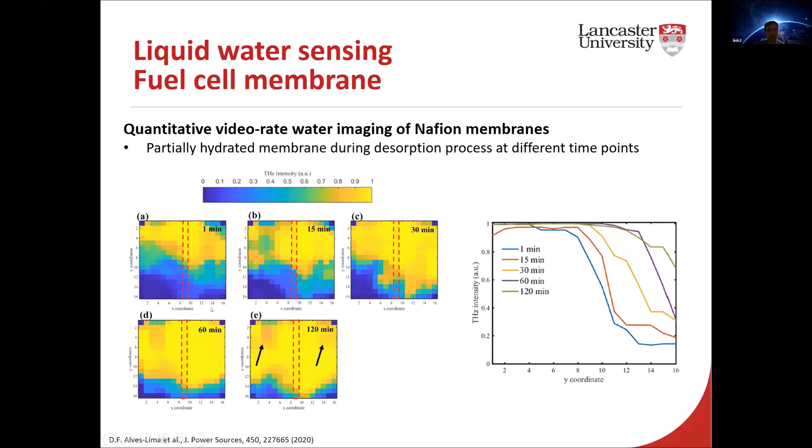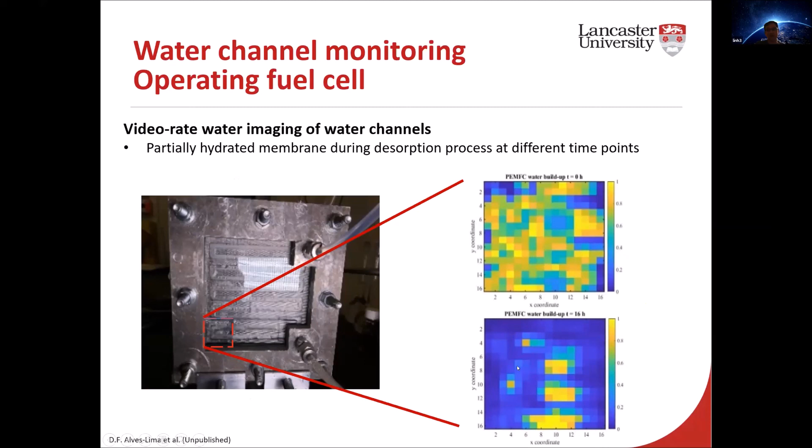Sure. So this terahertz image shows areas of dryness versus areas of wetness, and over time you see areas replaced with dryness. Now we're extending this further to an actual hydrogen-based fuel cell in operation, where we can start seeing the buildup of water in water channels. This is the very beginning of a process and the very end, so again, this is very early work in progress.

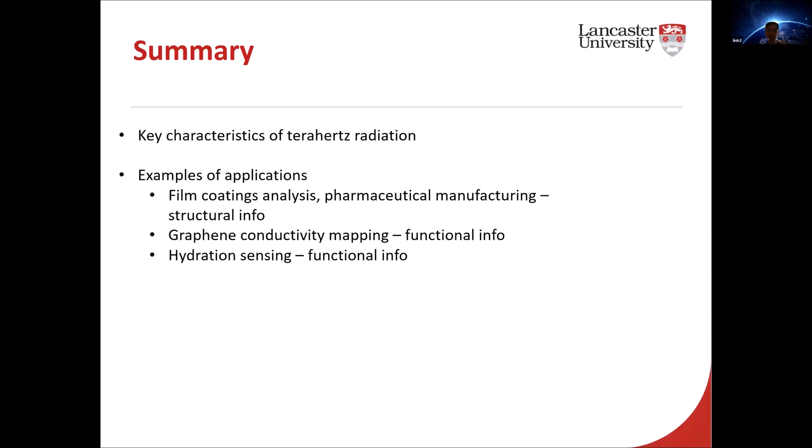Key summary: you've seen some key characteristics of terahertz and examples of applications, looking at structure information in pharmaceutical film coatings or functional information in terms of electrical conductivity and water content. I have to thank my funders as well as collaborators, and yeah, any questions?

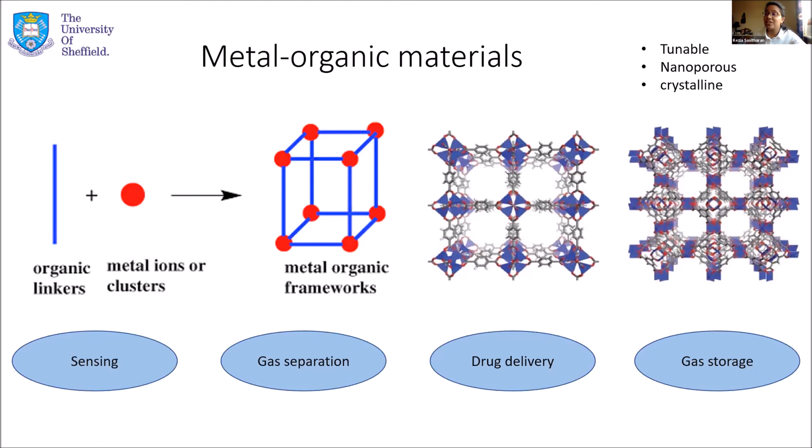They had a brief time of being tested in dye-sensitized solar cells, where they were used to have a systematic arrangement of the dye molecule in order to reduce recombination losses. But their 3D structure makes them limited for applications in thin film solar cell technologies.

So in our group, what we focus on is taking a layered MOF structure and exfoliating it into nanosheets. What we do is expose the surface area of these materials by having them in nanoscopic dimension, and this also enables them to be easily blended with fullerenes and polymers, thereby providing easy integration into thin film solar cells.

So looking at my project, we started off by testing porphyrin-based structures, which are synthetic analogs of chlorophyll, and this makes sense when one of the applications is light absorption.

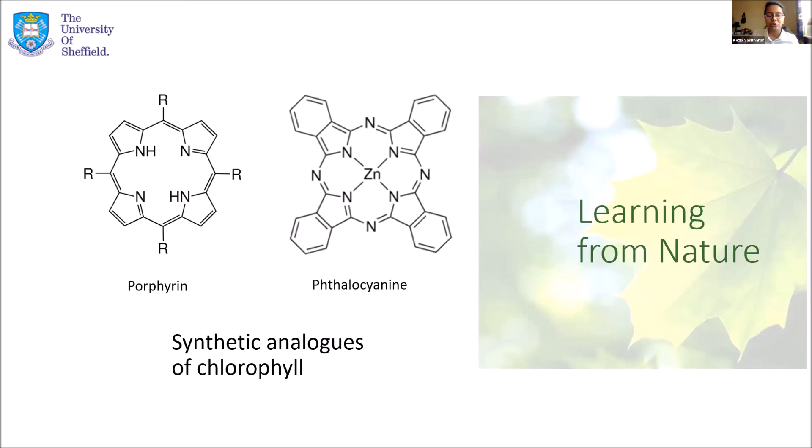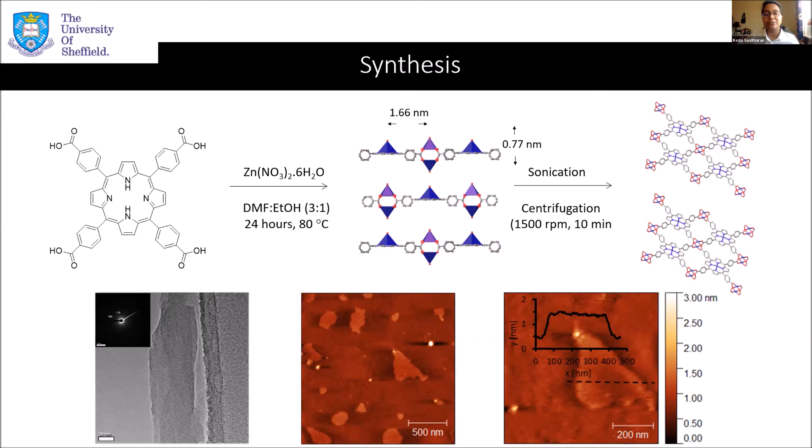So this is how the material is made. Since these materials have a modular structure, you can tune the functionality by choosing the organic linker of choice for the particular application. Here we have the porphyrin system linked with the metal cluster to form the 3D MOF structure, which is then exfoliated to form the nanosheets known as MONs. Microscopic investigations show that these materials approach monolayer thickness and are about 100 to 500 nanometers in lateral dimension.

So why MONs? These are an emerging class of 2D materials, and what sets them apart from other 2D materials like graphene and transition metal dichalcogenides is that their band gap is structurally tunable, not layer dependent. The band gap arises from the organic linker used to form these structures. They are also far more easily solution processable, approach monolayer thickness, can be easily scaled, and are stable at room temperature.

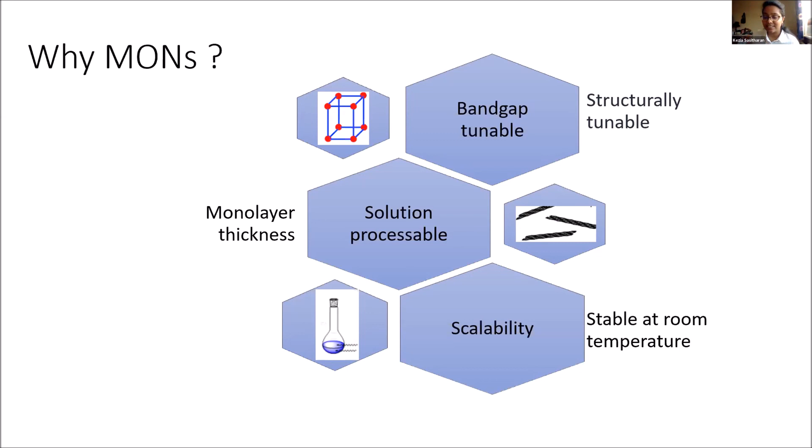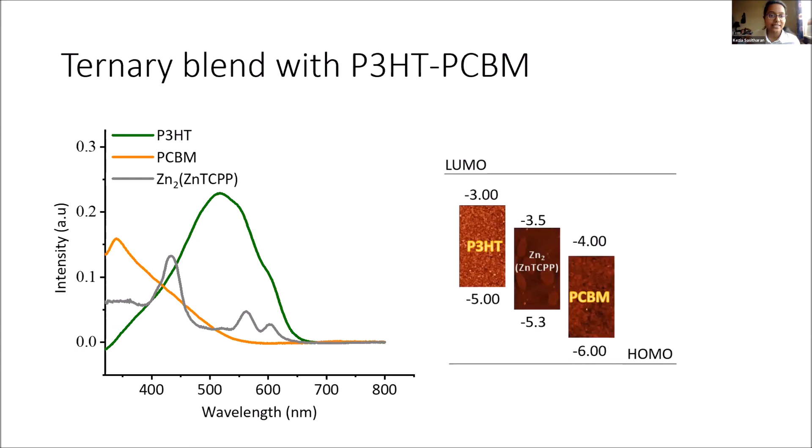So harnessing these benefits of MONs, these porphyrin MONs were investigated in a ternary system with P3HT-PCBM, mainly motivated by the ideal position of their band gap with the donor and acceptor in the system. After optimization, we found that about 20% by weight of these MONs in the ternary system contributes to a near doubling of device power conversion efficiency, with simultaneous improvement in JSC, VOC, and FF.

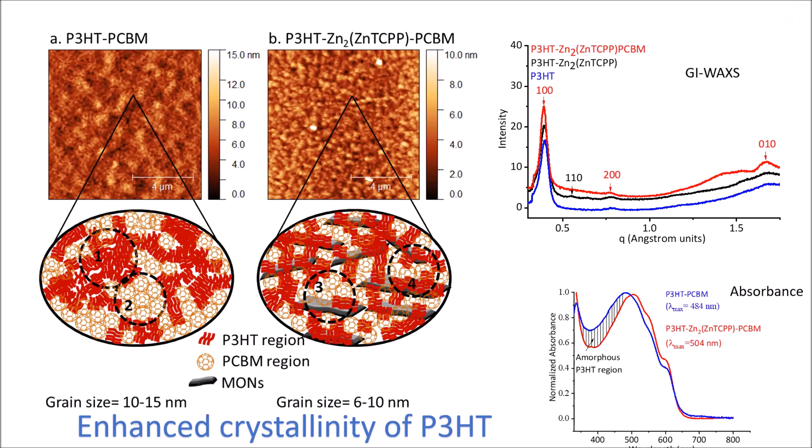Currently we're investigating the energy level alignment of these systems in the ternary blend to see what role the energy levels play in contributing to enhanced performance without creating traps for the excitons.

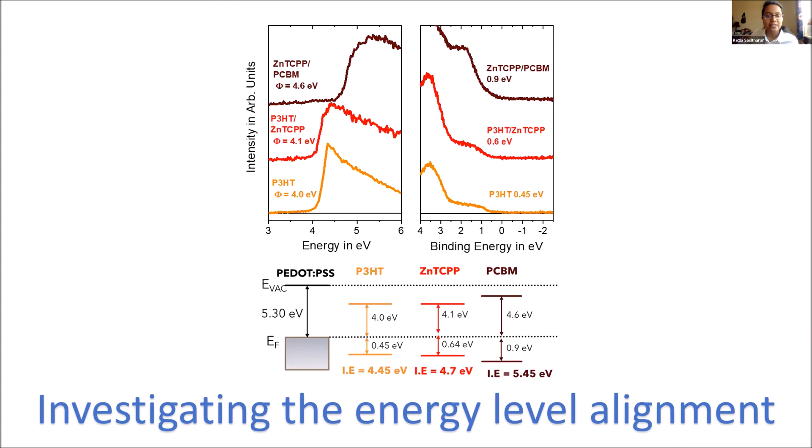So to conclude, this work sets the stage for investigation of low dimensional materials in organic photovoltaics, mainly that having the right morphology and the right energy levels can create new possibilities for integrating these systems into thin film solar cell technologies.

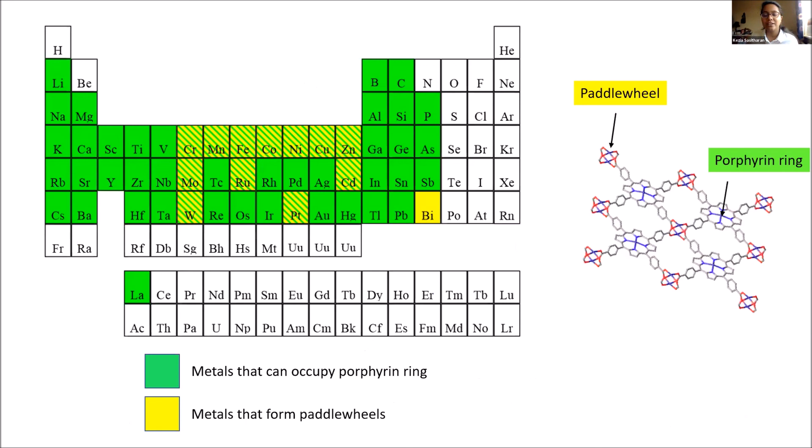There is a wide scope for investigating other materials by replacing the metal units and the linker, studying an entire library of these compounds and seeing what kind of effect they can have in the solar cell system.